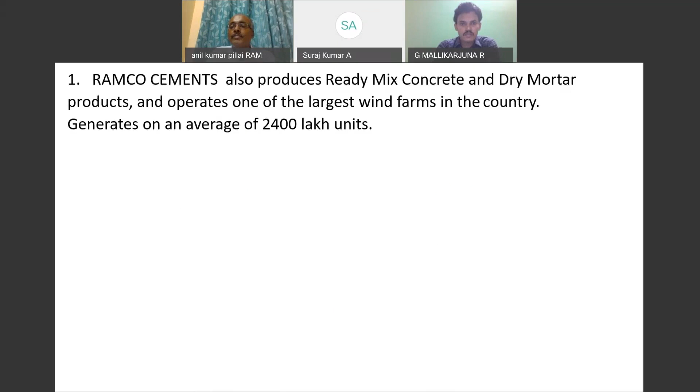Just a few initiatives - all of you know about Ramco Cements. We are one of the largest producers of cement in the country, with a total capacity of 16.5 million tons, expected to increase to around 20 million tons with our expansion. One of the major expansion projects coming up is in Kurnool. Apart from that, we make ready-mix concrete and dry mortar products, and we operate one of the largest wind farms in the country. As all of you know, Ramco Systems is also well known in the country as well as globally.

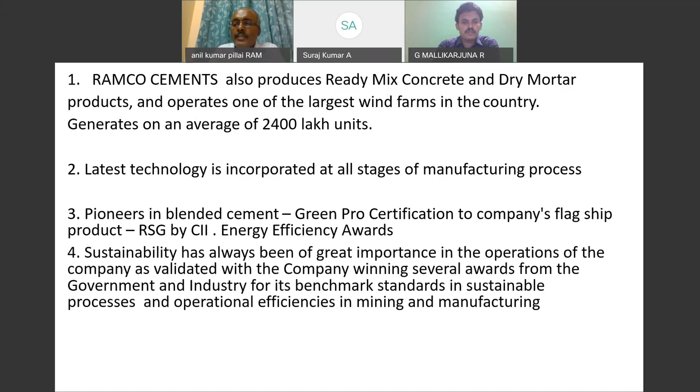So we have a combination of all this - whether you talk about cement, Ramco Systems, dry mix range of products, or renewable source of energy - we have been implementing the latest technology in almost all stages of manufacturing, starting from mining till packing. We have been having so many awareness programs as well as seminars on blended cement - blended cement, concrete with various types of materials, various kinds of admixtures. We have been doing a lot of trials at our Ramco Research Development Center.

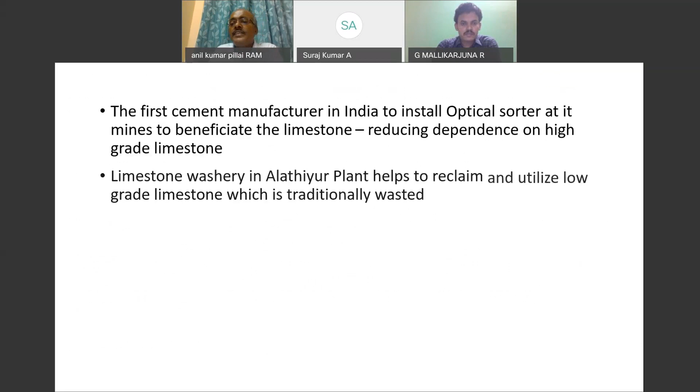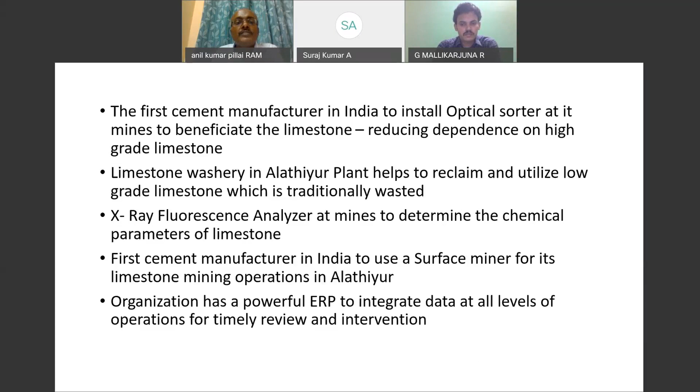As far as technology and measures for energy efficiency, as well as initiatives for testing of raw materials and cement is concerned, we have been able to introduce the latest equipment. One of the most important things is that it is not only in manufacturing but also in testing we need to have the latest equipment, because until the testing is proper, you will not be able to understand or develop the things. Apart from this, we have a powerful ERP to integrate data at all levels of operation, because that is very important.

Rather than promoting a particular type of cement, we try to understand the concrete requirements, and then based on the requirement of concrete and the type of project - whether it's a ready-mix plant, an infrastructure project, or individual house builders - we have different types of cement. We have ordinary Portland cement, 43, 53 grade, 43 grade infra. This infra cement is used for places where you need higher slump retention.

Then we have the cement for precast application, the Ramco Superfast. Then we have the PPC cement, out of which Ramco Supercrete is a cement meant for concreting - it has a high rate of gain of strength with low heat of hydration and low lime leaching. Then we have the Portland slag cement, Ramco Super Steel, Ramco Super Samudra. And then we have sulfate resisting Portland cement. So these are the types of cements that Ramco Cement is manufacturing.

Apart from that, we have the dry mix range of products which are used for fixing of tiles, fixing of blocks - the Superfine is there. For plastering applications we have various products, tile grout. So this is what we have got - the Ramco Supercrete cement, which is a cement with high compressive strength, low heat of hydration, meant for high performance concrete.

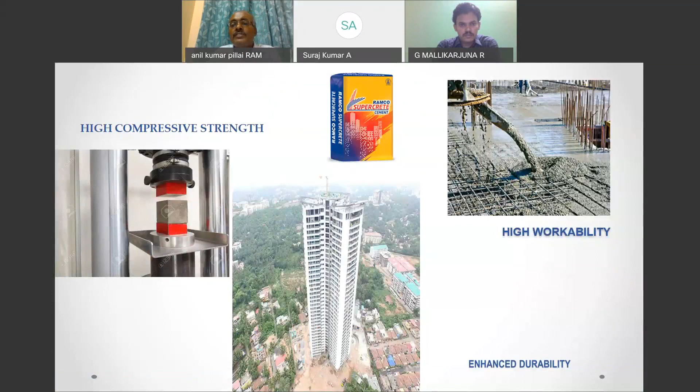So this is what we have been able to get. Various construction sites have been using it - they have been getting the compressive strength, the durability, and a high workability which is required in all the sites, as all of us know.

Of course, research and development is very important in cement and concrete. You can see the various types of concrete being manufactured in the country - take the case of self-compacting concrete or various kinds of high-performance concrete. When you talk about high-performance concrete, we are trying to enhance one particular property of concrete - it could be early strength, durability, workability, or the ability to pump concrete to greater heights. To achieve any of these things, you need to have an effective mix design. This is what we are lacking in most of the construction sites.

What happens is, you don't have a proper quality control, especially at the smaller sites where they do volumetric batching. So that needs to be taken care of. Once we are able to take care of those construction practices, I think most of the problems can be solved.

Now, to give impetus to that, what we do is that we do trials at the research center and give those kind of recommendations to the construction professionals. So that is very important. And we do that kind of hand-holding to sites which are not able to do that. That kind of support is there.

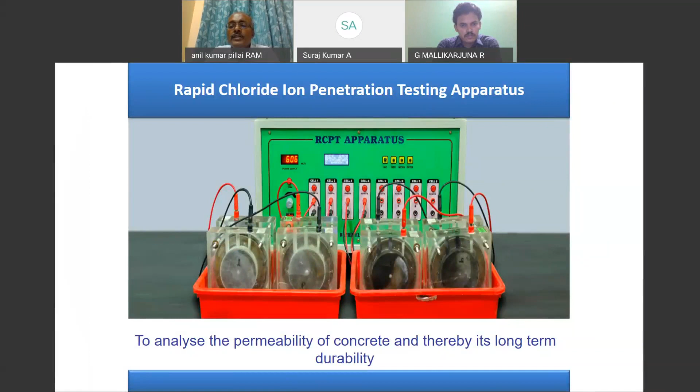Of course, all of us know that durability is important, but what are we going to do? How do we measure durability? This is where you have the RCPT test, which is meant for evaluating the durability of concrete. Depending on the amount of charge that is passed to the concrete specimen, if the amount of charge passed is higher, that means the concrete is not durable. If the amount of charge passed is lower, the concrete is very good, it is durable.

Now, similar to the amount of charge, you have the water that is penetrating. Based on the penetration of water, you have this DIN standard water permeability apparatus, wherein you can have the specimen and pass water through it with pressure. Based on that permeability of water, you can evaluate whether the concrete is durable or not. If the permeability or penetration of water is more, the concrete is not durable. So, as much as possible, we need to ensure that the permeability of water through the concrete is less than the cover to the reinforcement bar.

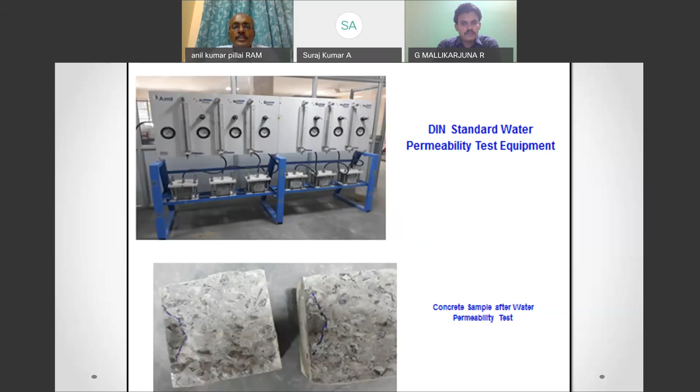Because once the water reaches the concrete steel reinforcement bar, as all of us know, corrosion occurs. So that is where we need to look at durability from the perspective of charges passing, or water penetration passing. We will be able to evaluate the durability of concrete that way.

Now, this is the theme that we are having: the right product for the right application, based on which you can use it for various structures. We have been getting a lot of awards. One amongst them is the Four Leaves Award, which has been given to us for leadership in technology, energy efficiency, utilization of blending materials, and our customers.

We have various institutions. We have the metro projects, whether it is Delhi Metro, Bangalore Metro, or Chennai Metro. Our brand is approved in almost all these metro projects. Take the projects in the eastern part of the country, our brand is being used, whether it is a multi-storied building, infrastructure projects, or precast applications, you will find that we have been able to make a mark.

And the construction professionals, construction organizations like Larsen & Toubro, or for that matter, ITD Cementation Company, they have been able to give us full support. And they have been using our cement in various kinds of projects and various exposure conditions.

So today, we have Dr. Mallikarjuna Rao, who would be talking about a very important aspect, using fly ash and GGBS, because in our country there is a perception that blending material is only used from an environmental perspective. It is not that — even from a qualitative perspective, these materials can be used, and for durability as well. So from that perspective, this topic is of very significant importance, because there are many government projects where it is surprising to see that blended cements are not being recommended or specified. Still, there are projects like that. So in this scenario, I think a topic on fly ash and GGBS geopolymer concrete will throw more light on this.

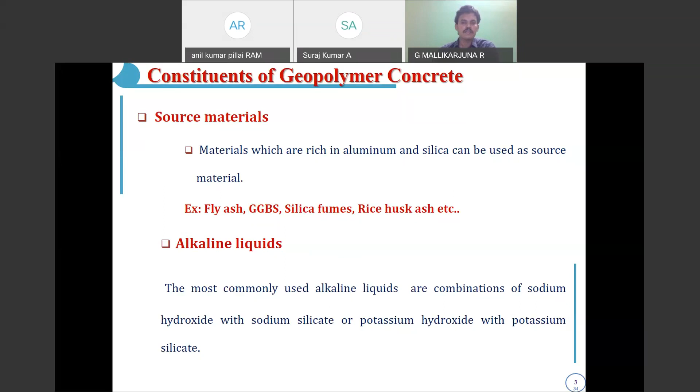Many foreign researchers have contributed a lot of work on geopolymer, and one government building in Australia was constructed using geopolymer. In India, mainly sodium hydroxide and sodium silicate are used as the main ingredients for the production of geopolymer.

Before discussing geopolymer, we'll first discuss commonly used construction materials. Nowadays we go with RCC, which is concrete and steel. For that, we require certain properties. Whenever we produce any concrete, we need to maintain certain properties at the site condition from a construction point of view.

The first property is density. We have to maintain a certain density. As you're already aware, concrete has a density of 2,400 to 2,500 kg per cubic meter, and compressive strength generally varies from 20 to 50 MPa. The tensile strength of concrete is very low compared to compressive strength.

It is approximately 2 to 6 MPa, and the modulus of elasticity for this concrete we are going to consider from IS 456:2000 as 5000 root FCK, the theoretical modulus of elasticity. Coming to the steel, we are going to consider the materials.

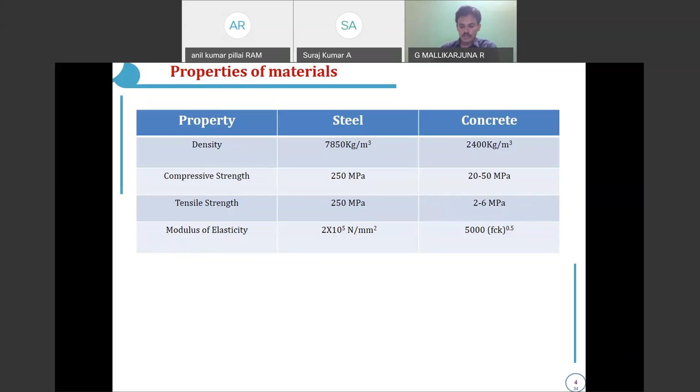Density of steel is 7850 kg per meter cube, compressive strength is 250 and tensile strength is 250, and modulus of elasticity is 2 into 10 to the power 5. These are the general properties we are going to consider for the production of this concrete.

These geopolymers generally we are not going to use for in-situ conditions. We can go with precast applications. Why? Because we have certain limitations whenever we are going to produce this geopolymer.

One is that we are going to utilize waste materials such as fly ash and GGBS, and there are no certain guidelines for the preparation of this geopolymer concrete.

Whenever you are going to replace water with alkaline activator solution, we have sodium hydroxide and sodium silicate, but the sodium hydroxide is in solid form. We want to make it into liquid form, and for that we are going to use the molarity.

Whenever you are going to produce that sodium hydroxide solution, a certain amount of heat will be liberated. This was the main drawback whenever you are going to produce this one.

One more thing is that whenever you are going to go for the casting, one day before, we have to mix that sodium hydroxide and sodium silicate solutions, and the next day we are going to go for the casting.

So it is very difficult for the labor working at the site to learn how to produce this alkaline activator solution, and also the calculations of the sodium hydroxide, since a lot of heat will be liberated there.

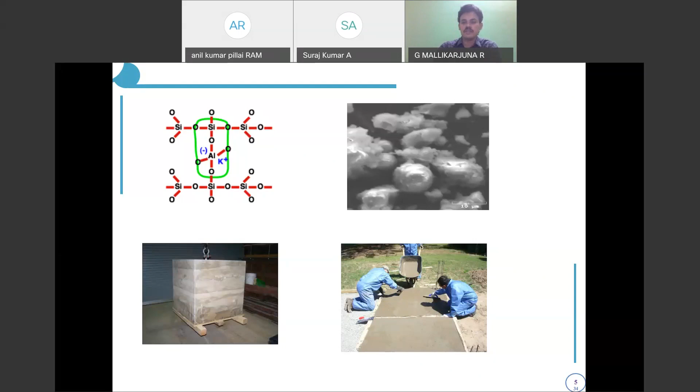One more thing is that whenever we are going to prepare geopolymer, the first main source is that we are going to utilize fly ash or GGBS or rice ash, whatever waste materials are coming from the industry.

Fly ash, as you are already aware, comes from the thermal industry, and we are going to use that fly ash nowadays. The code also recommends that up to 30% we can use fly ash as a replacement of cement, and nowadays in the entire market all the cements are PPC.

Whenever you are going to produce any cement, for production of 1 ton of cement, approximately 0.8 ton of carbon dioxide will be liberated into the atmosphere, and a whole 7% of carbon dioxide emission is because of the production of cement.

Whatever waste materials are there, every year the production of cement and globalization is also increasing, and the production of cement is also increasing. In the world, India is the second largest producer of cement, and the first place is China. Whenever you are going to produce cement in this pattern, you are mainly using lime, siliceous material, and calcareous material.

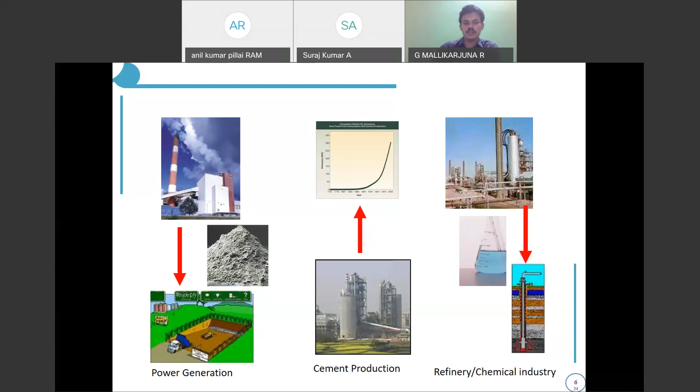So this is a process where you need not dump any material, and you can use that waste material as a useful material for the production of this geopolymer.

So that fly ash plus alkaline activator is going to produce a certain amount of strength. There are certain limitations whenever you use only the geopolymer, meaning this fly ash as the source material. First, in the formation of this geopolymer, we had the aluminates plus silicates in the source material, and we use an alkaline activator solution. We mix both materials and get the geopolymer gel.

That gel mainly forms based on the silicate to alumina ratio. Whenever you maintain the silica to alumina ratio as one, you get structures like this tetrahedral shape, that is polysialate. If you maintain the silica to alumina ratio as 2, you get polysialate-siloxo. And if you maintain the silica to alumina ratio as 3, you get polysialate-disiloxo. These are the 3 basic forms based on your ratio.

Mallikarjuna, can you keep your head a little closer to the speaker, because there is a voice break happening. Yes, now it's okay. Yes, sir, now it is. Yeah, now it's all right.

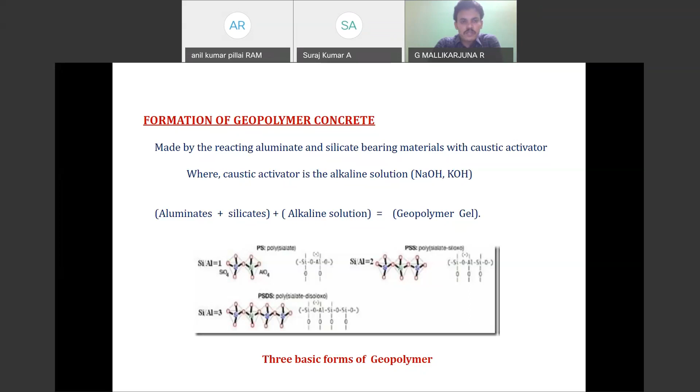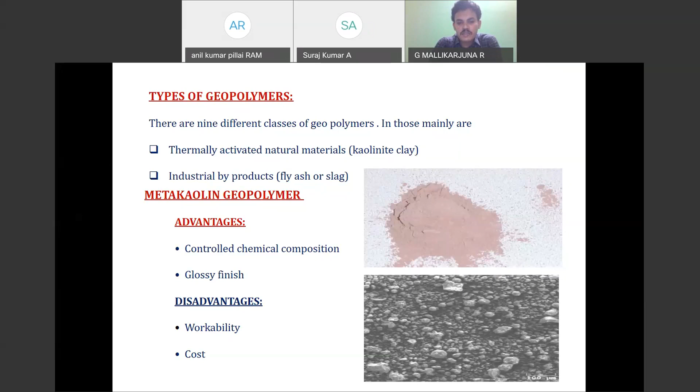The types of geopolymer: first, thermally activated natural materials like kaolinite clay, and industrial byproducts like fly ash or slag. They first started with the activation of metakaolin, which we can also take as a soil. One advantage is that we have controlled chemical composition, and whenever you use this geopolymer, we get a glossy finish. The disadvantage is that, depending on the alkaline activator, we get less workability, and the cost also increases.

The fly ash based geopolymer has the advantage of low cost and good workability. Since the fly ash particles are spherical, they improve the workability of your concrete, and we get high compressive strength. But this compressive strength depends on the concentration of the sodium hydroxide solution. One disadvantage is that we get variable chemical composition of the fly ashes when collecting different material from the thermal industry, and based on the coal source, the types of fly ashes will also vary.

In Indian conditions, there are two different types of fly ashes: one is class C, and the other is class F. If the calcium content is less than 20%, we consider it class F fly ash. If the calcium content is greater than 20%, we consider it class C fly ash. In Indian conditions, a very small amount of class C fly ashes are available, while class F fly ashes are available abundantly.

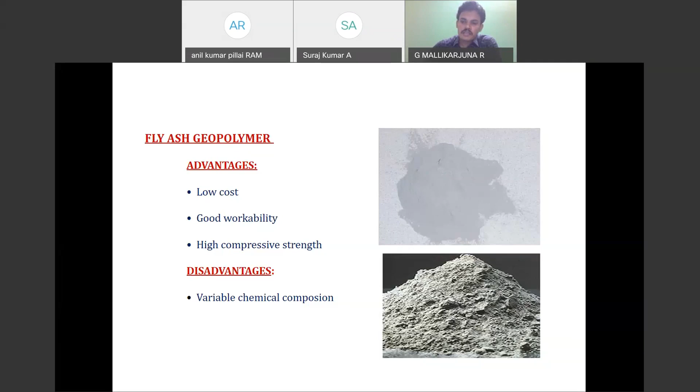In this geopolymer mechanism, we use fly ash and alkaline activators of sodium hydroxide and sodium silicate. After that, you maintain a temperature of 60 to 80 degrees centigrade for 12 hours, and store the specimens, whether cubes, cylinders, or whatever you have cast, at open air atmosphere, and you get a certain amount of strength.

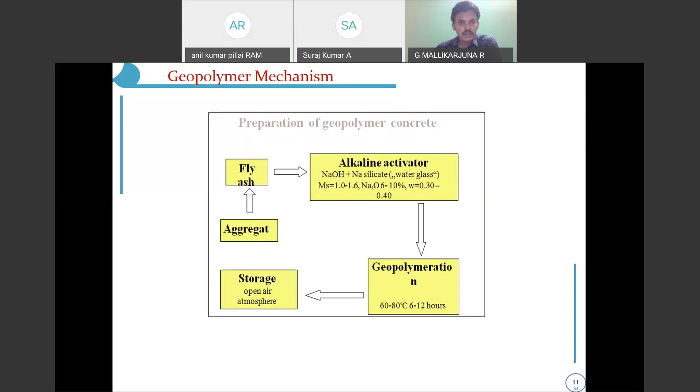I will explain that mechanism in detail. Cement production releases a lot of carbon dioxide. This data is given by the Green Rating Project in 2009, showing that every year there is an increase in cement production, and a lot of million tons of carbon dioxide is being released into the atmosphere.

This is the survey we have taken. And there is one more thing: excessive sand mining is also present in our country.

So nowadays we are going to use this stone dust as a fine aggregate material also.

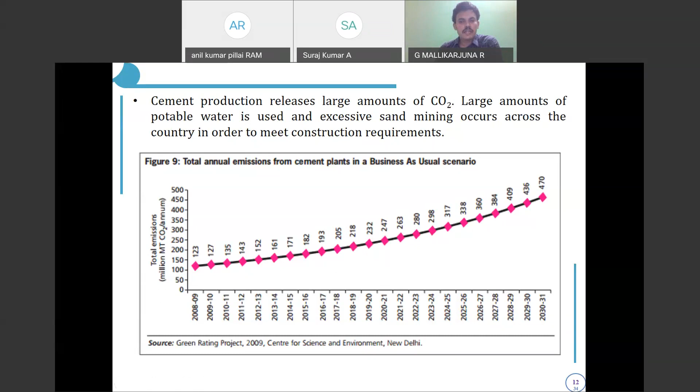Coming to the chemical composition of fly ashes, we have different types of coal available: bituminous coal, subbituminous coal, and lignite coal. Based on the calcium content, based on the type of coal, you are going to get the ashes, and we call it bottom ash or fly ash, pulverized ash. There are different types based on particle size collection, but fly ashes are going to vary.

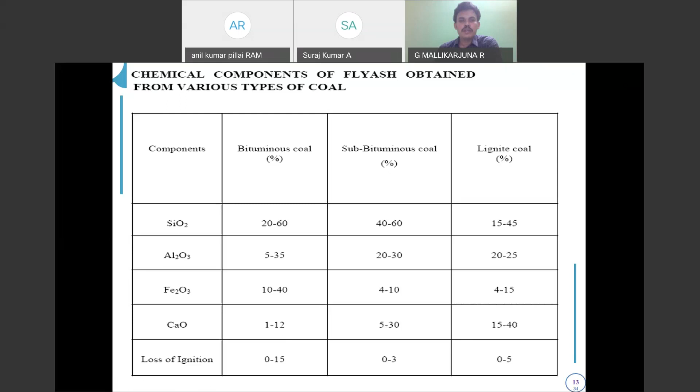And here we have sodium silicate. How are we going to select this sodium silicate solution? The sodium silicate has a main sodium content of up to 7.5 to 8.5%, and silica content varies from 25 to 28%, with the remaining being water content. But these we get directly from the market.

But the main important thing is that there is no restriction for quality checking, or how much content it should be there. There is a lot of research going on to replace sodium hydroxide and sodium silicate with a single activator solution, because cost-wise it takes more cost when you produce or take sodium hydroxide and sodium silicate solution.

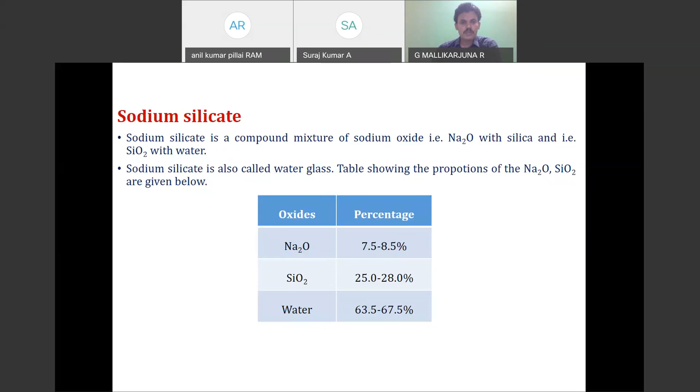And this is the sodium hydroxide. We can take it in pellet form, or flakes, or granules, and we can call it caustic soda also. These pellets we are going to add for an 8 molar solution. We are going to take 320 grams, and we are going to prepare 1 liter solution. And the sodium silicate to sodium hydroxide ratio we are going to vary from 1.5 to 3.

Many researchers have concluded that for the sodium silicate to sodium hydroxide ratio, we get the maximum strength at a ratio of 2.5.

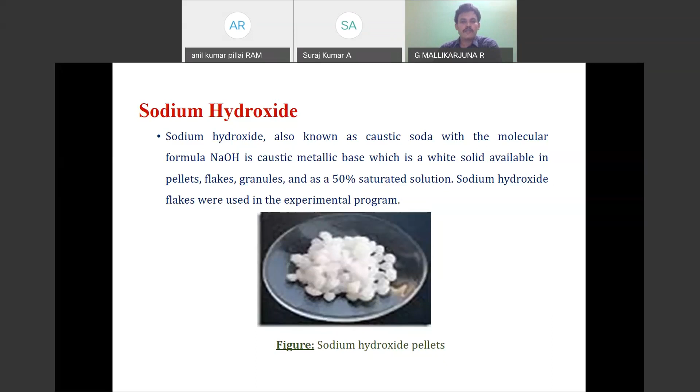In this introduction part, we have 3 different types of cementitious materials available: calcium, silica, alumina systems. Whenever you activate any material, the entire system is divided into 3 different forms: moderately calcium rich cements, low calcium cements, and hybrid cements. Whenever you consider these low calcium cements, hybrid cements, or high calcium cements, the activation process will vary.

One is that if you take high calcium materials, that is nothing but Portland cement or GGBS, there the main reaction forms calcium aluminum silicate hydrate gel along with CSH gel. Whenever you take more of this calcium source material for activation, the concentration of sodium hydroxide can be reduced.

And if you go with moderately low or low calcium materials for the activation process, such as metakaolin or class F type fly ashes, you have to maintain high temperature, go with a high alkaline media, and maintain curing temperature from 60 to 200 degrees centigrade. There is formation of an inorganic alkaline sodium aluminum silicate hydrate gel.

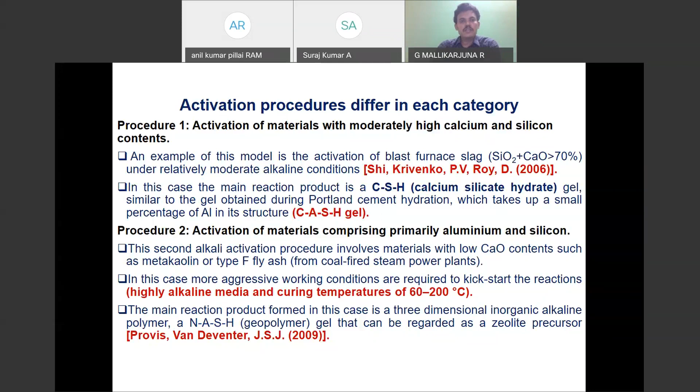And here, this procedure will be divided into 2 different groups: one is group A and the other is group B.

Here one is nothing but cement plus slag, and the second one is cement plus fly ash, and cement plus slag plus fly ash. Like that, researchers had taken different types of combinations for the preparation of this geopolymer concrete.

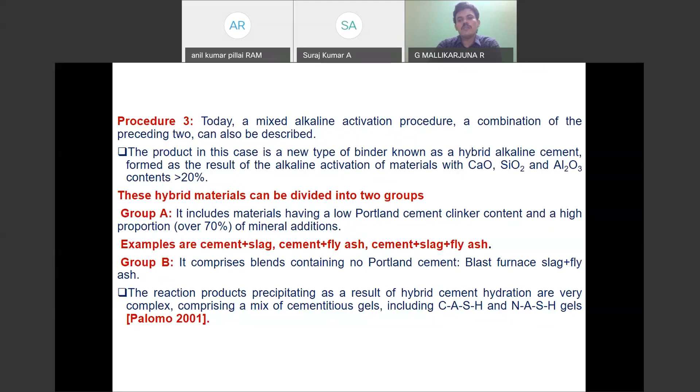But whatever research I carried out, I had taken Group B category, that is nothing but blast furnace slag plus fly ash. There they may form the combination of calcium alumina silicate hydrate gel, as well as sodium alumina silicate hydrate gel for the formation of this geopolymer.

The geopolymer systems will be divided based on whether you consider medium to high alkaline solution for the preparation of this geopolymer. In the hydration process, silica plus calcium gives us the CSH gel, and the main product is zeolite. We get silica plus alumina systems as the main ingredients in the alkaline systems.

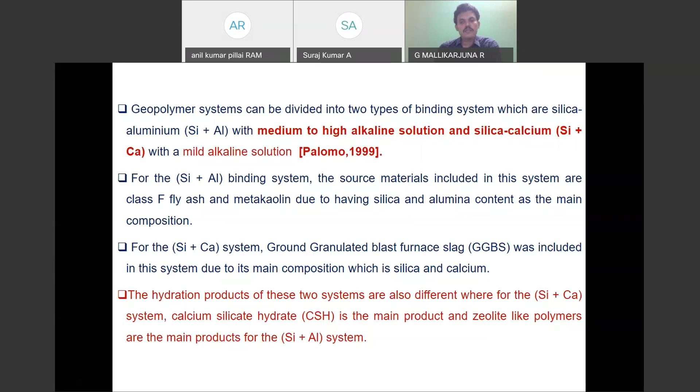The constituents of geopolymer include source materials like fly ash, GGBS, rice husk ash, silica fume, and the alkaline activators I already discussed, which are sodium hydroxide and sodium silicate.

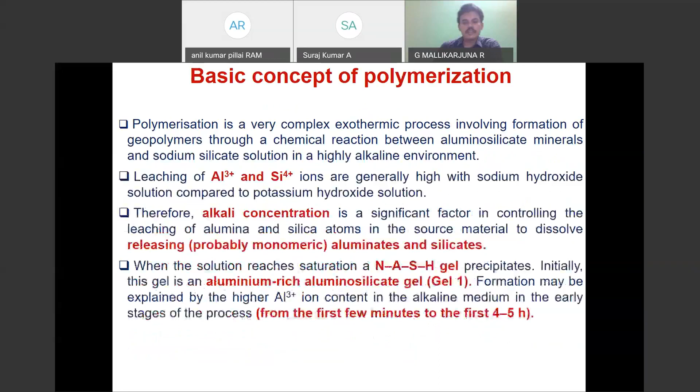Coming to the polymerization process, there are different steps. First is the dissolution of the solid reactants present in fly ash and GGBS or metakaolin, whatever source material you consider. Whenever you add these alkaline activators, first dissolution happens, then diffusion of the solid reactants, and next there is bond formation of alkaline, forming a ring-like type of structure.

Here alumina is the biggest one, and after 4 to 5 hours, the first bond formation is this alumina bond formation. After that, it gets replaced with silica, which is the strongest bond formed in the polymerization process. After that, we get tetrahedron shapes like this - this is the bond formation.

In order to get more strength, we go through polycondensation, meaning we maintain a certain temperature for hardening of that particular gel. Once hardening is generated, automatically the strength will be contributed to the geopolymer specimens.

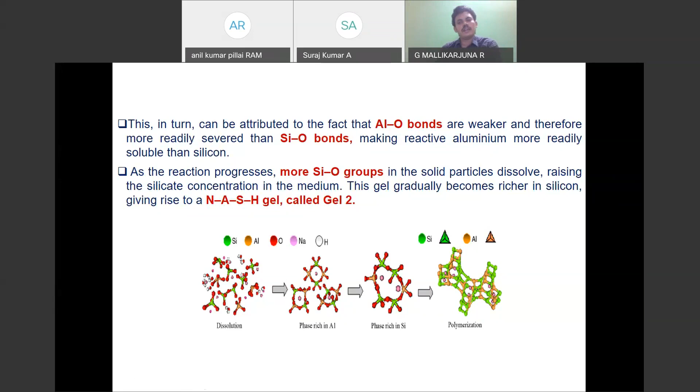This is a small introduction, and you can get all these things from the literature point of view. But when you go with workability and strength development, two important properties matter. One is that we cast specimens at in-situ conditions.

There is a limitation that we have to give a certain amount of heat in order to get strength if you go with fly ash based geopolymers. But my research mainly focused on mix design methodology, and we produced concrete from 20 to 60 MPa.

We replaced 100% cement with fly ash and GGBS in different combinations, and water with alkaline activator solution of sodium hydroxide and sodium silicate, maintaining the concentration of sodium hydroxide at 8 molar. Before this, research had done a lot of work on fly ash based geopolymer.

Fly ash based geopolymer has a restriction that we have to go for higher concentrations of sodium hydroxide solutions, and the curing condition is also completely different.

Whenever we go with conventional concrete, we keep specimens in water for curing, but here it's completely different - it's an entirely different process. We go for 60 to 90 degrees centigrade temperature for 24 hours, then take it outside and keep it at room temperature till the testing date of the specimens.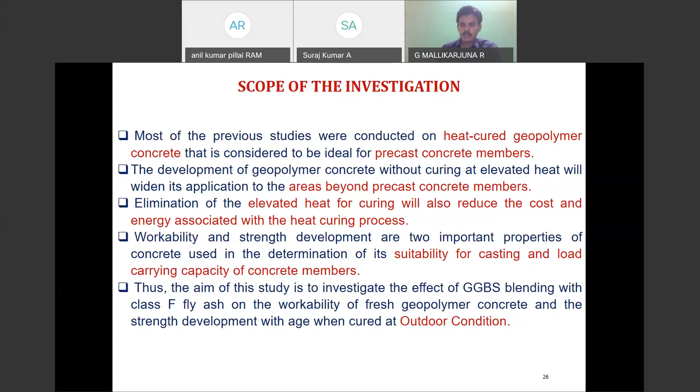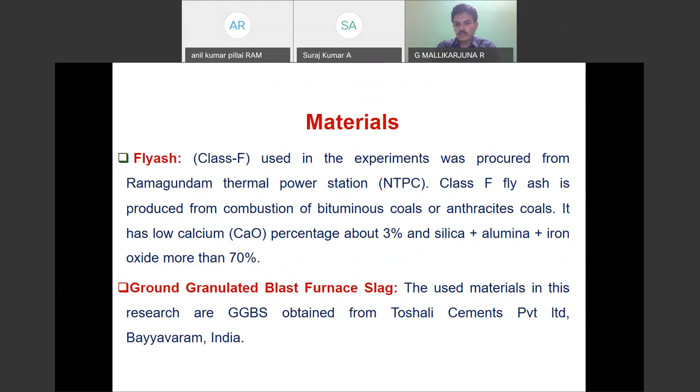In order to overcome that limitation, since there are no proper guidelines, we took different combinations of fly ash and GGBS and developed a mix design methodology for the geopolymer. We collected fly ash material from NTPC Ramagundam, and ground granulated blast furnace slag from Toshali Cement, Bayyavaram in Vizag. This is the chemical composition of the fly ash and GGBS.

The calcium content present in the GGBS is approximately 32.6%.

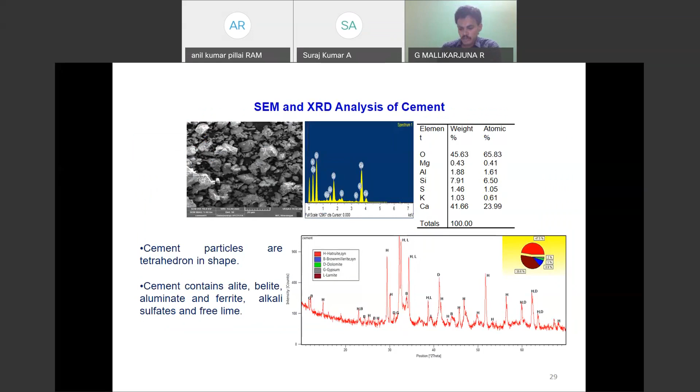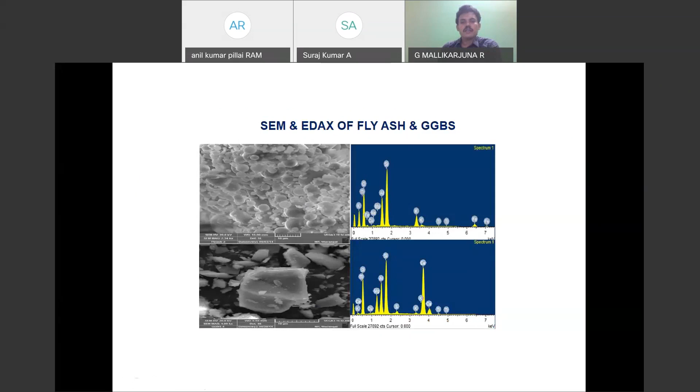If you see the cement XRD analysis we conducted in our laboratory, the cement particles are of tetrahedron shape. We had different source materials like alite and belite, identified through cement XRD analysis. We conducted the same analysis for fly ash and GGBS. The fly ash shows a completely spherical shape, while GGBS is angular in shape. We did this experiment to see the particle shapes, and this is the XRD analysis for our fly ashes.

I think there is some voice problem. There is a mute, has it been muted, Suraj? Sir, it's a bandwidth issue. Okay, in case of a bandwidth issue, he should be back. We'll wait for a couple of minutes. I think there is some problem with the bandwidth. He would join us anytime.

It's a very interesting topic, as geopolymer concrete is still in the research stage. I don't know many places in our country using it at practical scale, but at the research level, geopolymer concrete is being used. So it's very important to study the properties of fly ash and slag. That is where XRD analysis for fly ash and slag plays a vital role, because unless we understand the properties of these constituent materials, we may not be able to make good geopolymer concrete. When replacing cement with other materials, one needs to be very careful.

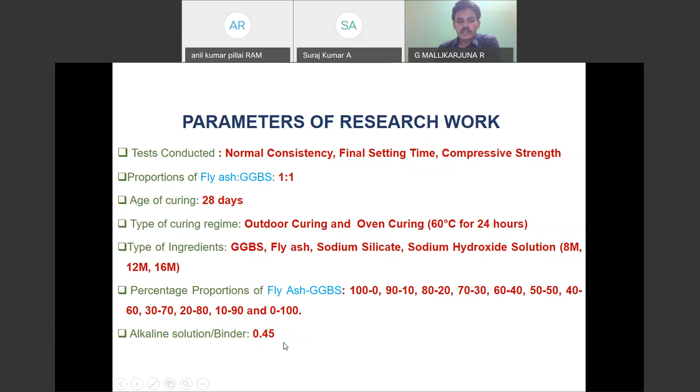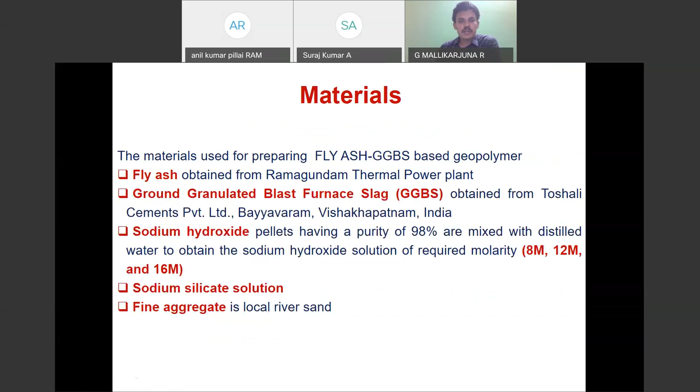The ingredients considered are sodium hydroxide and sodium silicate, and for the different concentrations of sodium hydroxide we considered 8 molar, 12 molar, and 16 molar. The proportion of fly ash and GGBS was varied from 100-0 to 0-100, and alkaline to binder ratios were varied at 0.45. The fine aggregate considered was local river sand that is available. The alkaline activator was prepared 24 hours prior, and we maintained the sodium silicate to sodium hydroxide ratio at 2.5.

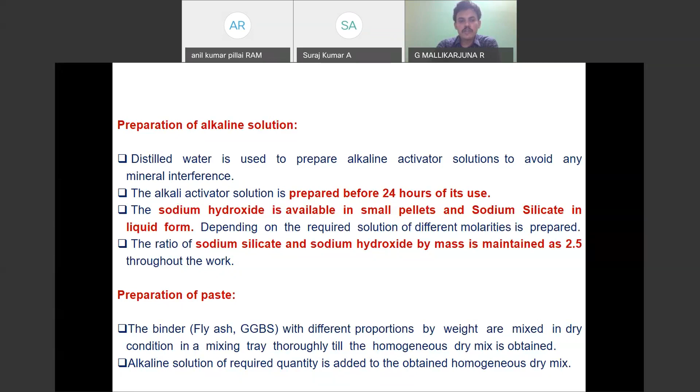But why did we consider sodium hydroxide and sodium silicate? Potassium hydroxide and potassium silicate are quite costly, and the reaction is slower compared to sodium hydroxide and sodium silicate solution. But sodium hydroxide and sodium silicate are also quite costly. So we are doing research on this single activator solution to activate fly ash and GGBS materials. We maintained the sodium silicate to sodium hydroxide ratio as 2.5, and prepared the paste. Since there are no guidelines for considering normal consistency and setting time, we followed the same pattern to study normal consistency and final setting time.

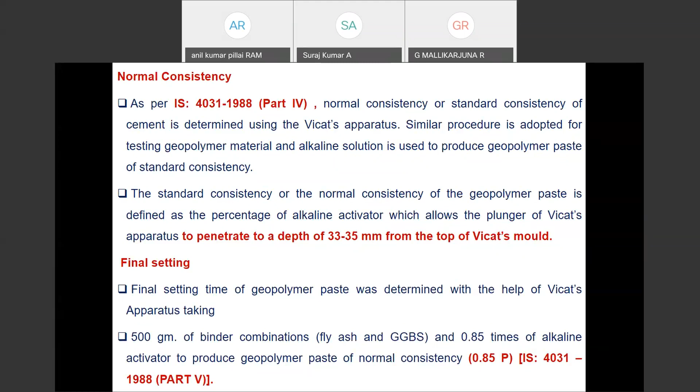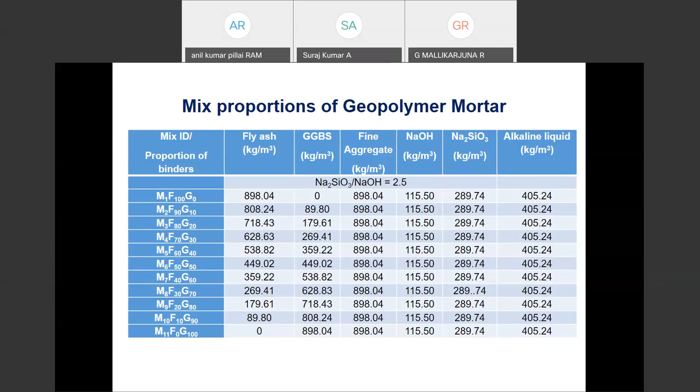Here the normal consistency for 8 molar, 12 molar, and 16 molar concentrations, we have done the work, taking the ratios of fly ash from 100 to 0. After 50% fly ash, there is no much effect on the normal consistency of that particular combination. Whenever we increase the concentration of sodium hydroxide, the normal consistency values were also increased.

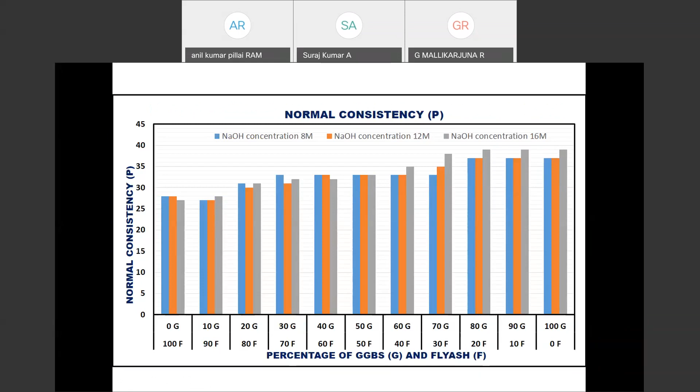This is the final setting time of these geopolymers with variation of molarity. Whenever we increase the GGBS content, automatically the setting time is going to be reduced. We observed that the optimal ratio we can vary for fly ash and GGBS is up to 50%.

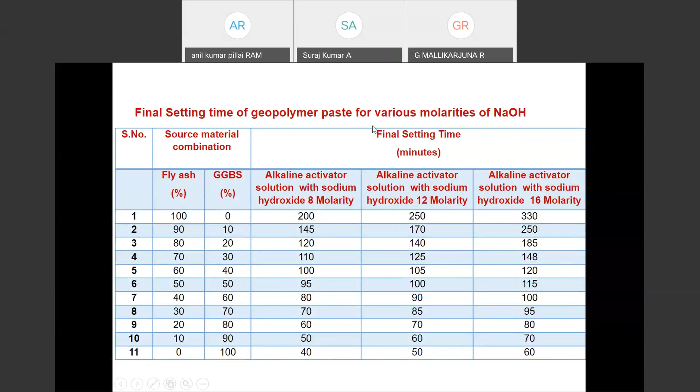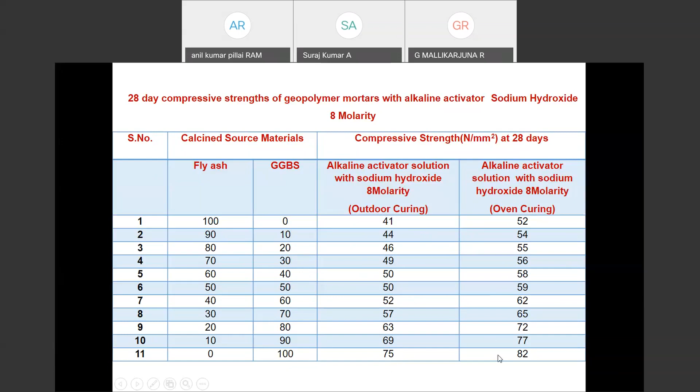Next, we have taken the 28-day compressive strength for 8 molar concentration. This alkaline activator solution varies from 100 to 0. Whenever we increase the GGBS content, automatically the strength increases. For oven curing, we get more strength, around 82 MPa after 28 days of testing these geopolymer specimens. For 12 molarity, it is up to 85 MPa, and for 16 molarity, it is 87 MPa.

Whenever we increase the concentration of sodium hydroxide, the strength increases. Whenever we increase the GGBS content, the strength also increases. First we identified how much alkaline content is required for preparation of this fly ash and GGBS paste. After that, the main problem in site conditions is setting. Whenever we go with a higher amount of GGBS content, the setting problem arises, while strength-wise it increases with increasing GGBS content and concentration of sodium hydroxide solution.

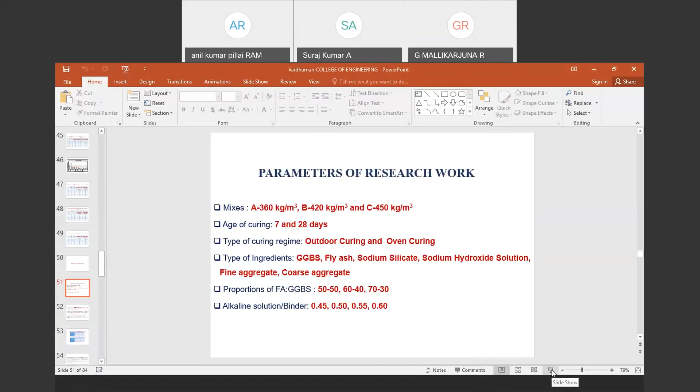I think again there is a problem, a connectivity issue. Looks like we have lost connection with Dr. Rao. Hello sir, yeah, now I think you can just switch off the video and then talk. Yeah, I switched off the video, Dr. Rao. That's to save on the bandwidth. Okay, you can continue, sir. Thank you. Currently it's parameter... Yeah, please take over. Thank you.

Yes sir, and the type of curing regime we considered was outdoor curing and oven curing. The type of ingredients considered were fly ash, GGBS, sodium hydroxide, and sodium silicate solution. The proportions of fly ash and GGBS we considered were 70-30, 60-40, and 50-50. Alkaline to binder ratios we considered as 4 different types.

Sir, one minute sir. Yes please, no problem. Do you need any assistance sir? Mallikarjun sir, do you need any assistance? Sir, do you need any help from our end? No sir, thank you, actually the power was gone sir. Okay, no issues, yes sir.

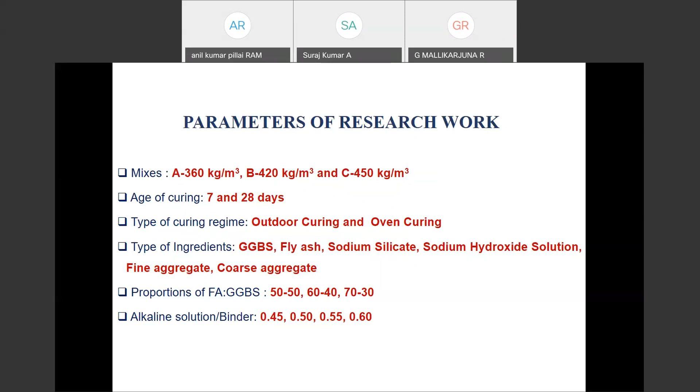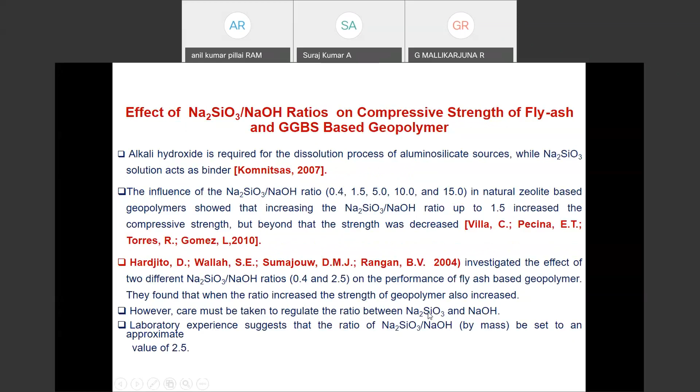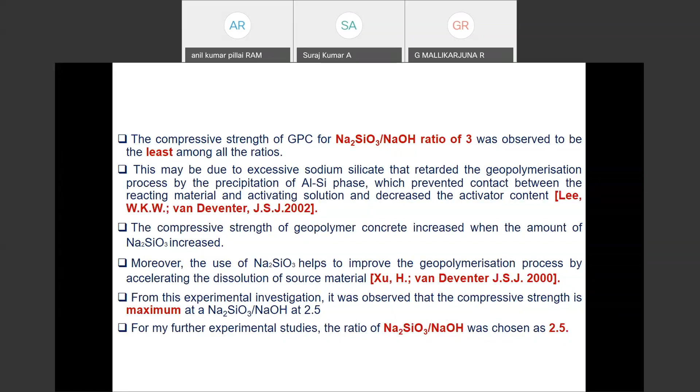We tested for 360, 420, and 450 kg per meter cube. We got the maximum strength at the ratio of 2.5 for 360, 420, and 450 also. This is because if you go for higher concentration of sodium hydroxide, the strength will be increased. But to get the maximum or improve the polymerization process, the required amount of sodium silicate solution had to be considered for the study. The experimental investigation shows that the maximum strength of sodium silicate to sodium hydroxide is at ratio 2.5.

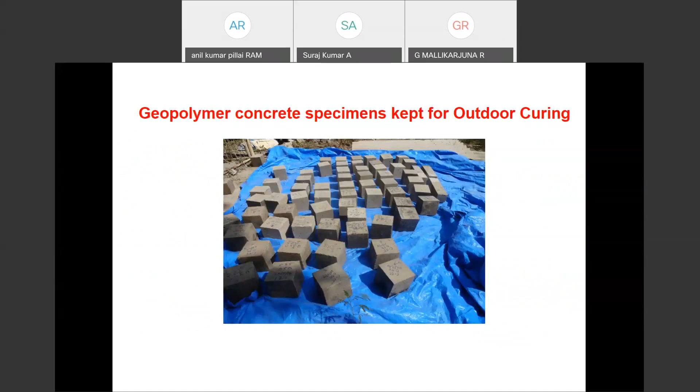After that, we had the limitation that we removed the specimens. We did not go for oven curing, because we have to produce the concrete in in-situ condition. For that, we prepared the specimens and left them out for outdoor curing. This casting was done under the same conditions as we prepare ordinary conventional concrete. We prepared this geopolymer concrete using the same pattern.

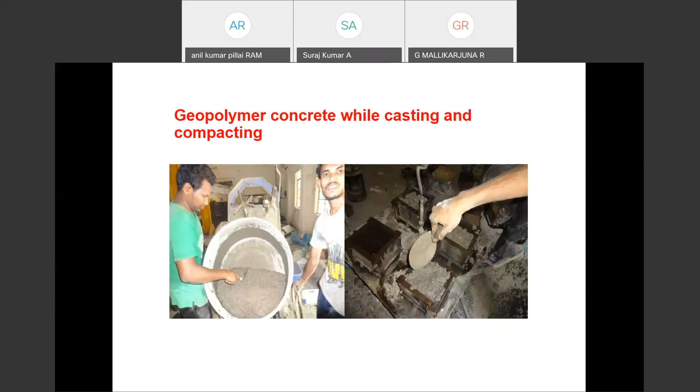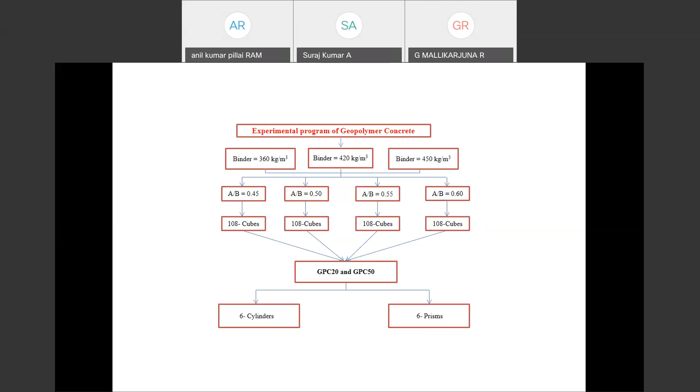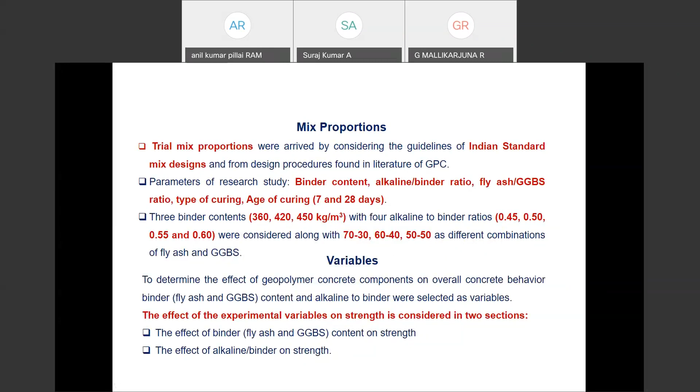We tested specimens for mechanical properties of flexural strength and split tensile strength across 20 to 50 MPa range. These are the binder contents we adopted for the mix proportion. In the experimental variables, we considered different sections: the effect of binder content, that is fly ash and GGBS content, and the effect of alkaline to binder ratio. Fly ash and GGBS were varied as 70-30, 60-40, and 50-50, and these were the mixes considered for our mix proportioning.

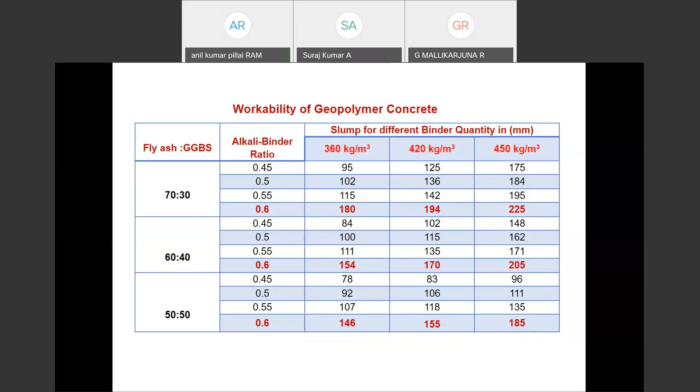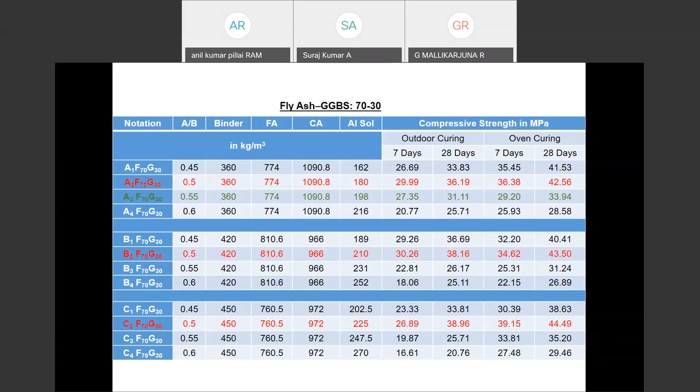Next, these are the different combinations of fly ash and GGBS we considered for 70-30, at 360, 420, and 450 kg per meter cube. Based on trial basis, we went for both outdoor curing and oven curing conditions for 7 and 28 days. For 7 days, we get the maximum strength at alkaline to binder ratio 0.5. For all the mixes of 420 and 450, we observed maximum strength at ratio 0.5, for both oven curing and outdoor curing. This is for the mixes of 70% fly ash and 30% GGBS.

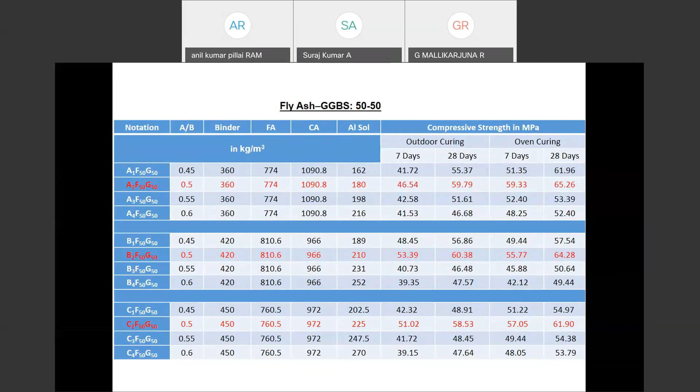Whenever we increase the GGBS content, strength improvement was automatically observed. Next is 50-50, with 50% fly ash and 50% GGBS content. For 360 kg per meter cube, we achieved approximately 59 MPa strength after 28 days without any oven curing, so we achieved our required strength. We produced strength ranging from 20 MPa to 60 MPa using these different combinations of fly ash and GGBS.

Next is the mix proportioning of this geopolymer concrete, where we studied different alkaline to binder ratios. When formulating this mix proportioning, we first fixed the concentration of sodium hydroxide as 8 molar, and varied the alkaline to binder ratios from 0.45, 0.5, 0.55, and 0.6. We tested the specimens for both 7 and 28 days, taking these tests on a trial and error basis.

After the formulation of this mix design, we considered different parameters: first, we decided to know the characteristic compressive strength of the concrete, then the alkaline to binder ratio, and next we took the aggregate to binder ratio effect also. Whenever we increase the binder content, we examined the effect of that particular amount of binder content in order to gain strength.

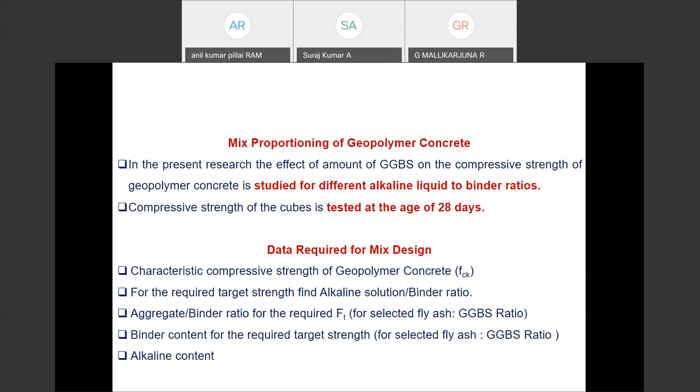Whether it is getting strength because of the calcium content present in the GGBS or because of the concentration of the sodium hydroxide, these things we have studied with the effect of binder content. The third one is the alkaline content we considered. This is step one, where we chose the different types of parameters.

Like that, we kept varying the aggregate to binder ratio and the fly ash to GGBS ratio, but kept constant the concentration of the sodium silicate to sodium hydroxide solution. We prepared charts for both outdoor curing and oven curing, so anyone can select based on their workability requirement and choose values for the production of strength.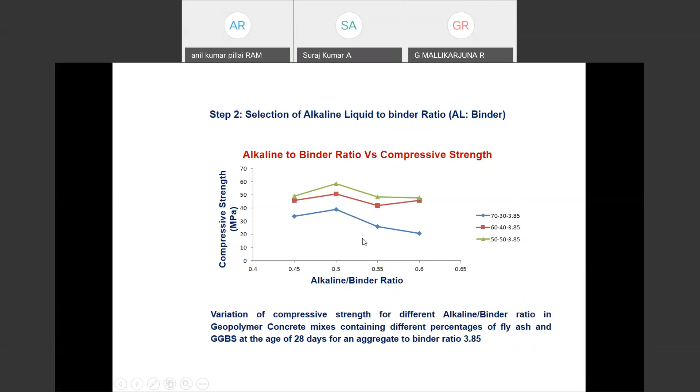Next, we drew charts for selecting the aggregate to binder ratio for a required target strength across different fly ash and GGBS ratio mixes. Here, from 360 we have taken mixes of 360, 420, and 450, and drew charts with different alkaline to binder ratios.

Here 70-30 indicates the fly ash and GGBS ratio, and the alkaline to binder content we took as 0.45, 0.5, and 0.6. The aggregate to binder ratio varies from 5.18 to 3.85. So whatever binder content you require, you can select your aggregate to binder ratio and alkaline to binder ratio—say 0.45—and based on your required strength select the appropriate mix.

To check whether the required strength is achieved, we selected two values for trial: for 450 kg per meter cube we considered 20 MPa, and for 420 kg per meter cube we considered 60 MPa strength.

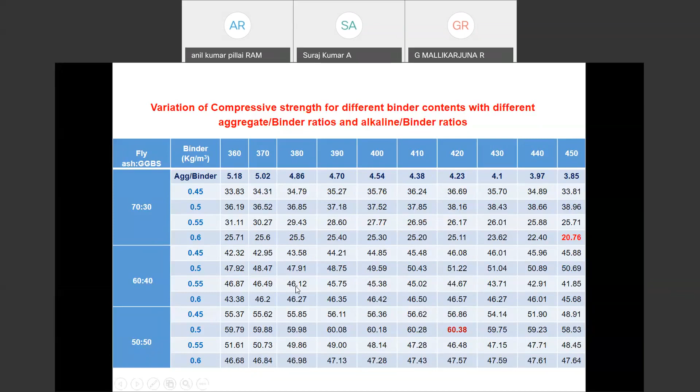After that, these are the charts we developed for the total geopolymer, where the fly ash binder content ranges from 360 to 450 kg per meter cube, and the aggregate to binder ratio is based on whatever slump value is required. If you want a certain slump value from 95 to 175, your required strength is also accounted for here.

Like this, we developed the entire set of charts for the mix design methodology, so that any required strength from 20 MPa to 60 MPa can be obtained. If you want to achieve 60 MPa strength, with either less or more binder content, we can still get the required strength here.

This is the oven curing condition, where we get about 4 MPa higher strength compared to outdoor curing. Our study aims to eliminate oven curing, but here we achieve a required strength of 64 MPa with oven curing.

Why is there strength improvement? The conclusion is that when we apply more heat curing, the polymerization process becomes faster, generating more strength at a lower age. Almost within 7 days, we achieve 88% of the strength.

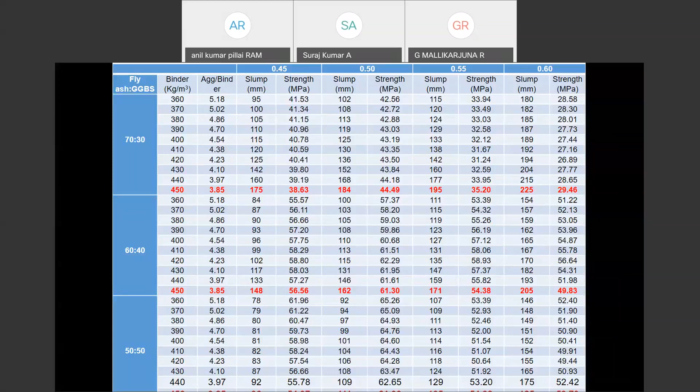This is the estimation of your coarse aggregate to total aggregate ratio. The coarse aggregate ratio is nothing but coarse aggregate by total aggregate. Once you know the total aggregate ratio, the total quantity minus coarse aggregate gives you the fine aggregate content.

The binder content we varied from 360, 420 and 450, and coarse aggregate to total aggregate we took values from 0.54 to 0.59, so that based on binder you can select the coarse aggregate to total aggregate ratio. Once you know that ratio, automatically you get the fine aggregate content. We know the density, the aggregate to binder content, and the alkaline to binder ratio. Based on these, once you deduct from the density to this alkaline content, binder content, and aggregate to binder ratio, we get the aggregate content.

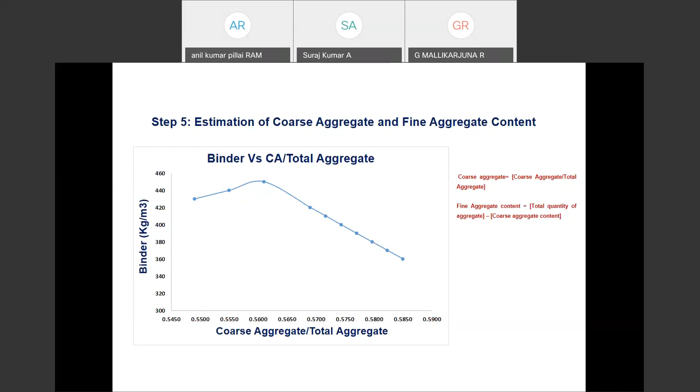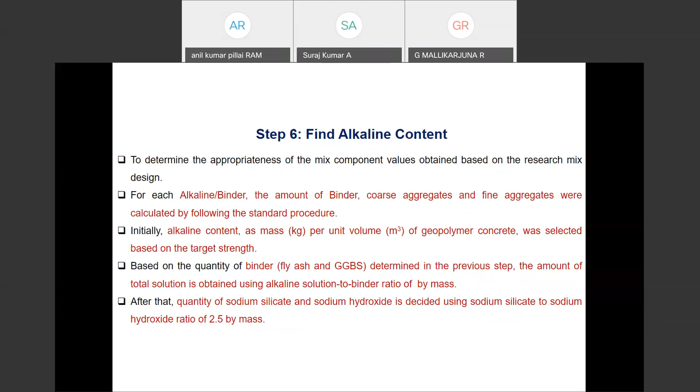Based on that, we get the total quantity estimation. I'll show you one calculation of how we did this. Finally we get the alkaline content, which can also be obtained directly from the alkaline to binder ratio, because we know the binder content and the alkaline content, and the alkaline to binder ratio.

Here the target required is 30 MPa. I had choices of 70-30, 60-40, and 50-50. The alkaline to binder ratio can be used for obtaining the strength.

Here the alkaline to binder ratio I chose as 0.55, with binder content as 370. For fly ash, if we go with 370 kg per meter cube, we can divide that fly ash to get 259, and GGBS as 111, and the aggregate ratio you get as 5.02.

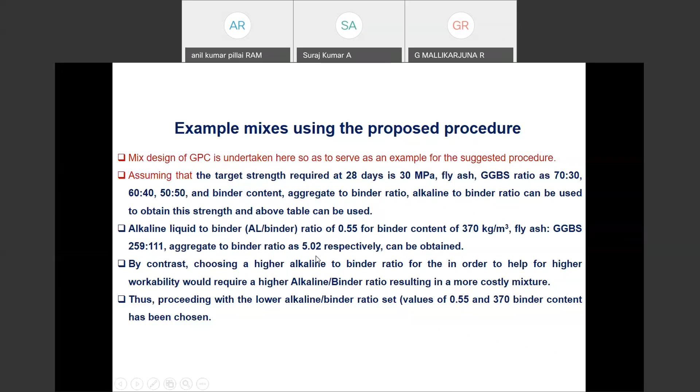Based on your required strength, you can select the values. First I selected the total fly ash quantity, 0.55 into 370, to get the alkaline content. From that alkaline content, I know the sodium silicate to sodium hydroxide ratio as 2.5, and from this we get the sodium hydroxide and sodium silicate quantities.

Once you know the total aggregate to binder content, and already knowing the binder content as 370, you get the total aggregate. From the curve we drew, the coarse aggregate to total aggregate ratio came out as 0.582, and from that you get the coarse aggregate.

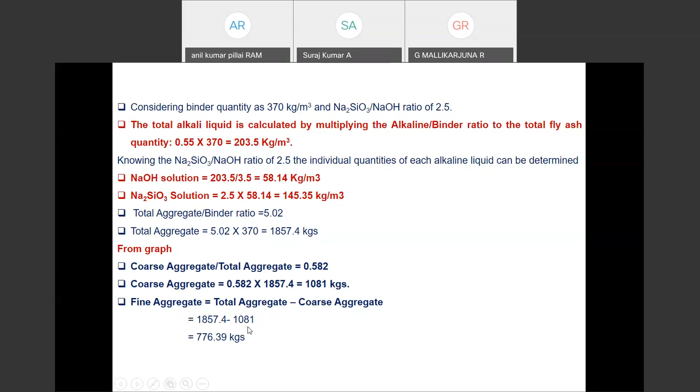Once you want the fine aggregate, total aggregate minus coarse aggregate gives you the fine aggregate. Like that, whatever quantities you require based on your estimation, you can select different mix quantities. The mix proportion we selected was for 30 MPa.

For that, fly ash and GGBS, we got 70-30, and I selected one mix to check whether this chart would get the required strength or not. So I tested this for both outdoor curing and oven curing.

If I went for outdoor curing, to get the required strength of 30 MPa, I selected the binder content as 370. For oven curing, I get more required strength, so I can reduce the binder content.

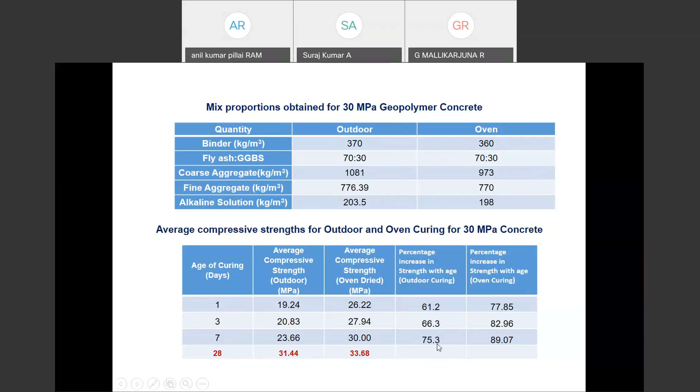If I go for oven curing with the same mix, 70-30, you also get 70-30 there. But you see only a slight variation of strength of 2 MPa after 28 days. However, almost 75% of the strength at 28 days is already achieved at the age of 7 days, due to the polymerization process.

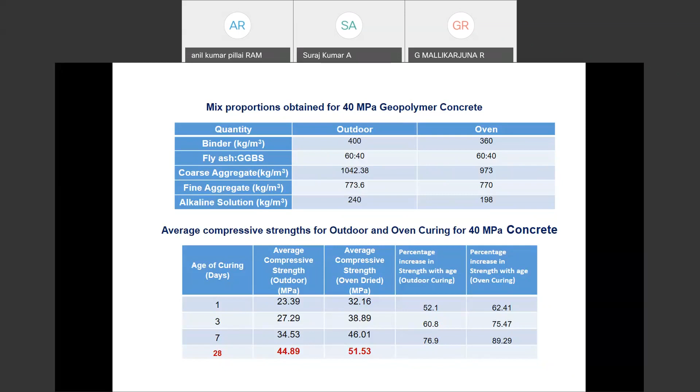This is the other mix I selected to get 40 MPa strength. I got almost 44.89 MPa at the age of 28 days. Next I went for 50 MPa and got the strength as 57.

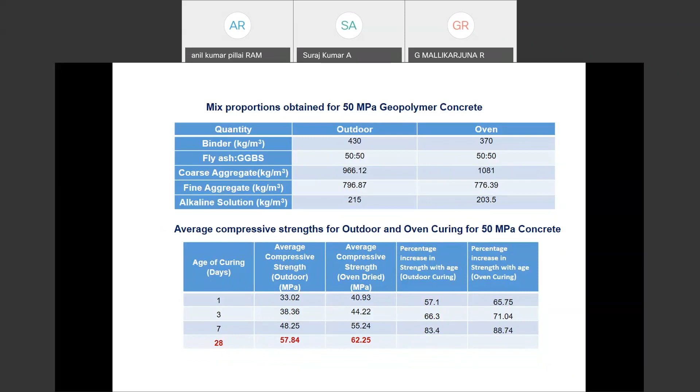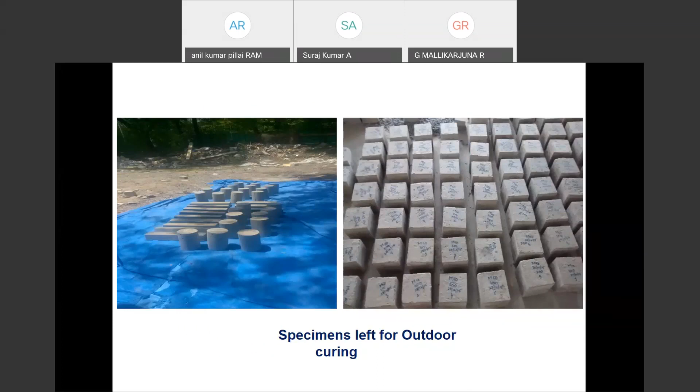After developing all the charts, I chose my own mixes and developed the required strengths of 20 MPa, 30 MPa, 40 MPa, 50 MPa, and 60 MPa. These were some of the specimens we prepared for the geopolymer concrete, kept only for sun curing, which we left out for outdoor curing during preparation of these specimens.

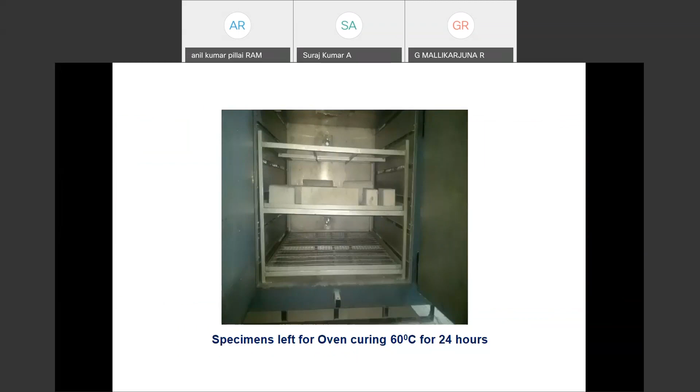And these are the specimens we kept for oven curing at 60 degrees centigrade for 24 hours. This covers the mix design methodology of geopolymer for the preparation of this geopolymer concrete.

I hope you got some basic idea regarding geopolymer. I'm thankful to Srinivas sir from Ramco Cement, and Srinivas Reddy sir from ICI, for giving this opportunity to present the fly ash and GGBS based geopolymer mix design methodology.

We are doing a lot of work on the durability aspect, and we also want to completely eliminate sodium hydroxide and sodium silicate. We want to come up with the most economical mixes at less cost.

Why? Because sodium hydroxide and sodium silicate take a much higher amount of the cost. Almost 5 liters of sodium silicate costs almost 1100 rupees, so the preparation of this is quite costly.

And this is from my side. One limitation is that we want to use waste material for maximum utilization, such as fly ash, GGBS, or you can go with red mud or metakaolin. Metakaolin has already been done. You can also go with fiber reinforcement.